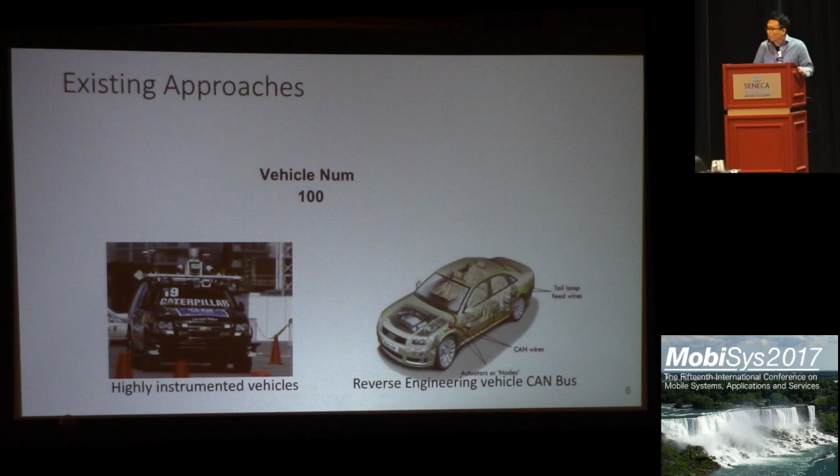Most existing efforts to collect driving data build on small fleets of highly instrumented vehicles or reverse engineer certain vehicle CAN buses. However, limited by the vehicle numbers, even if they're continuously operating on the road with test drivers, it is still challenging to accumulate a sufficiently large data set in a short time period. So to address this issue, we introduced BigRoad, which can scale road data acquisition to a large number of commercial vehicles, so that we can easily achieve the billion miles goal in a short time period.

BigRoad aims to minimize the instrumentation of the vehicle by relying on a smartphone and an inertial sensor that can be affixed to the vehicle. Such a setup can be easily deployed to a large number of vehicles and significantly accelerate the data acquisition speed.

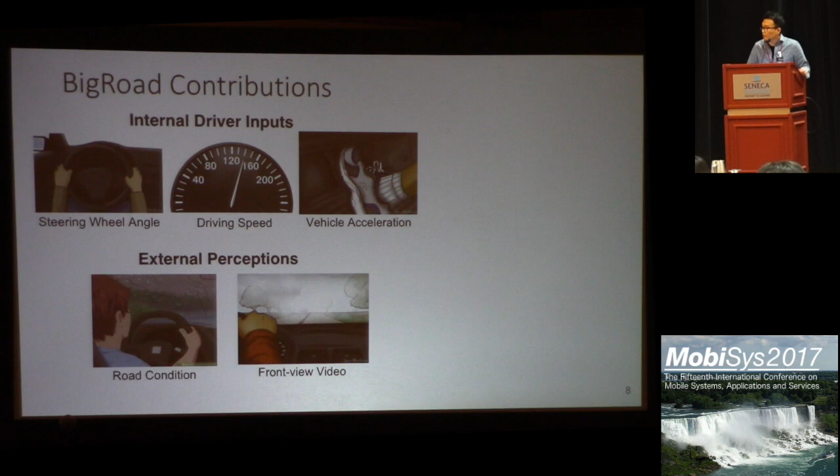Here's the contribution of BigRoad. BigRoad can derive internal driver inputs, such as steering wheel angle, driving speed, vehicle acceleration, and external perceptions of the road environment, such as road condition and front-view video. Most of this data are generated on the same smartphone, so they can share the same timestamp. We believe such synchronized data is extremely useful for training self-driving systems and can be used to detect unusual situations that are useful for self-driving.

Here are two key challenges towards large-scale data acquisition. First, how can we accurately determine proprietary driver inputs, such as the steering wheel operation, with such lightweight instrumentation? The key challenge is that the steering wheel angle is proprietary data that is not available from the commercial OBD device, and the accuracy requirement for self-driving is really high. So it is really hard for us to accurately determine the steering wheel angle with some naive approach, such as using a camera or a smartphone mounted on the dashboard.

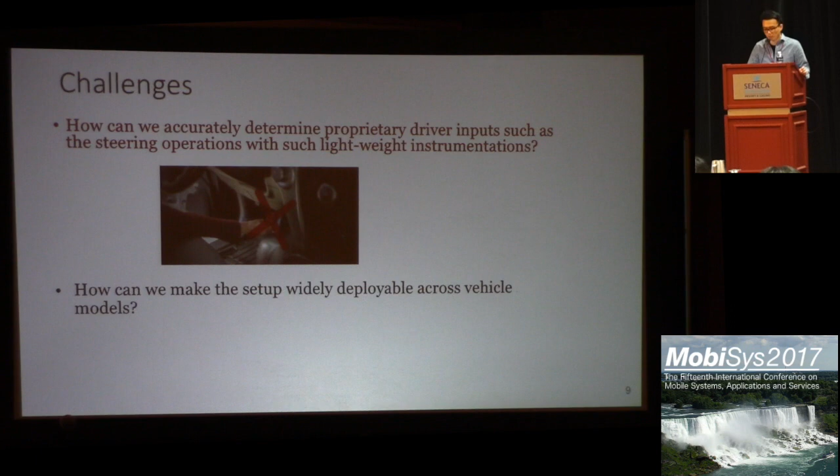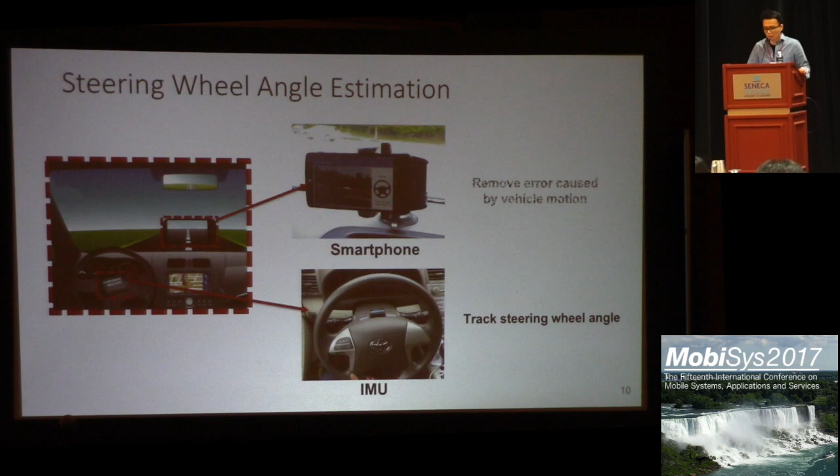So here we introduce a steering wheel angle estimation method based on a smartphone and the inertial sensor, which we'll call IMU in the later part, on the steering wheel. The reason we pick IMU is it can be used to track the steering wheel motion with a really low installation overhead. So the contribution here is we use the IMU to track the steering wheel angle and use the inertial measurement from the smartphone to remove in real time the error caused by the vehicle motion.

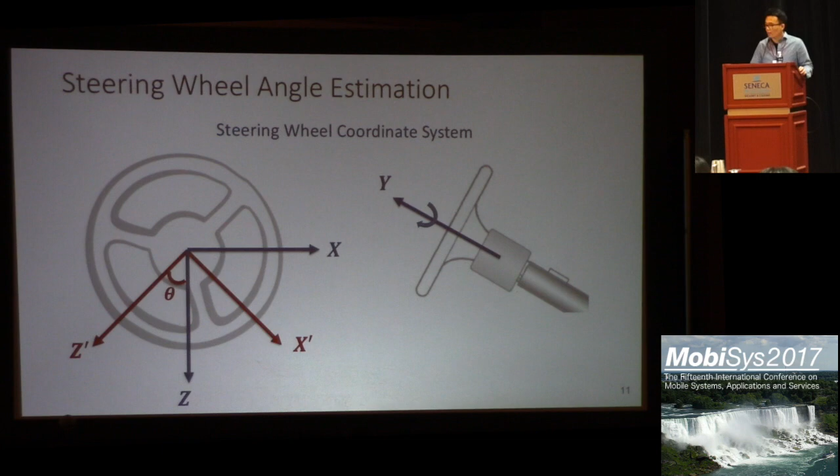So before I go into much detail, I will first introduce the steering wheel coordinate system. As you can see here, in this coordinate system the axes lie on the two-dimensional plane of the steering wheel, and its y-axis, as shown in the right figure, is perpendicular to this two-dimensional plane, pointing out of the steering wheel. So we assume that the IMU's sensor measurement can be read inside this steering wheel coordinate system at this point. When the steering wheel is rotating, it will rotate around its y-axis for a certain degree theta. Typically, there are two approaches to derive this angle change.

First, we can use the gravity projected on the two axes, x and z, to derive this steering wheel angle, which we call the accelerometer-based approach. However, the accelerometer reading from the inertial sensor has large dynamic error, which will cause a large vibration at once.

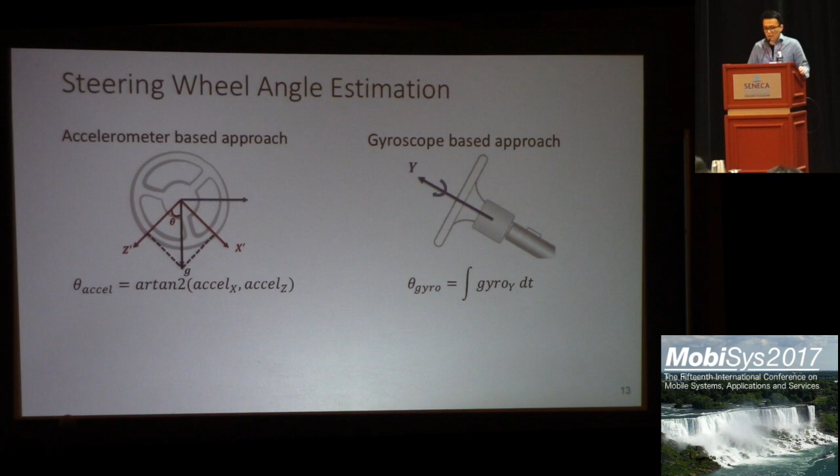The second approach is based on the gyroscope reading. So we can accumulate the angular velocity on the y-axis of the steering wheel to get this steering wheel angle change. However, the integration process suffers from accumulating error, which will result in a large drift over time.

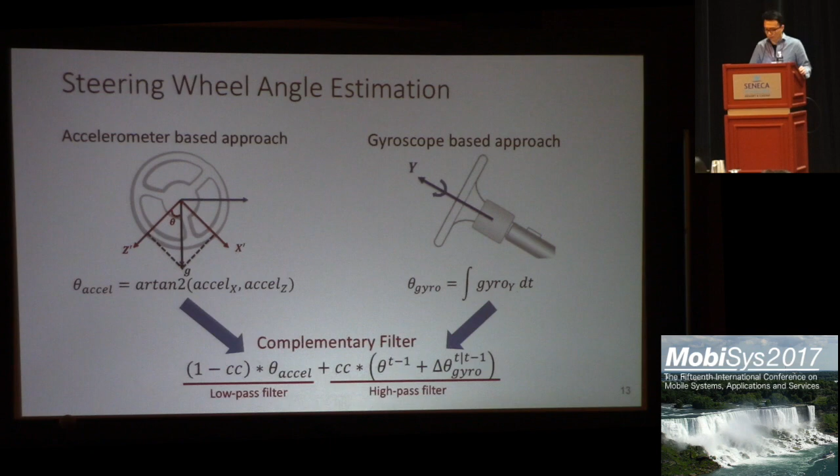To overcome these limitations, we use a complementary filter to fuse the result of the two approaches. We use a high-pass filter to fuse the gyroscope-based approach, and we put the accelerometer-based approach to a low-pass filter to fix this drift problem. And the parameters you see here, we use them to adjust the weight of the two filters.

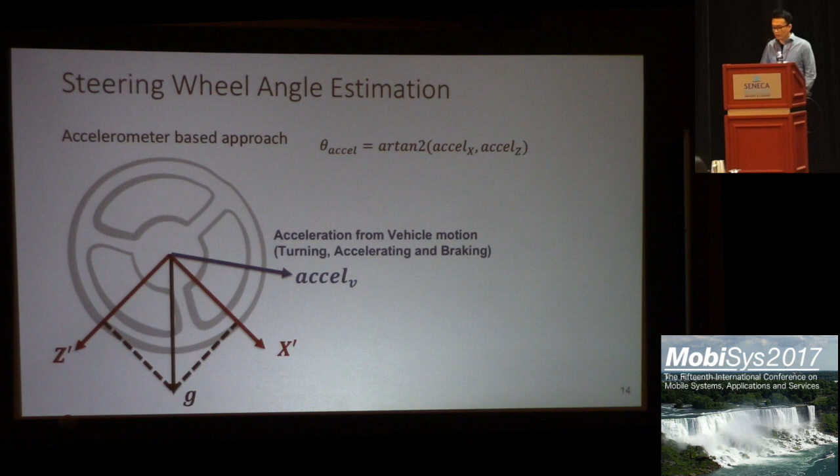However, we find that this accelerometer-based approach may not work very well inside the vehicle system. Because in the vehicle, besides the gravity, the vehicle's acceleration will also apply on this two-dimensional plane of the steering wheel. This acceleration will be caused by vehicle turning, accelerating or braking. We empirically find that this acceleration may cause 10 to even 30-degree error when the vehicle is turning. So a method is needed to remove this error, the error caused by the vehicle motion.

Based on some mathematical derivation that we explain in detail in our paper, we find that this error can be calculated by only using the acceleration in the vehicle's coordinate system. And it is independent of the rotation of the steering wheel. So we use the accelerometer reading from the smartphone to calculate this error and remove this from the accelerometer-based approach result.

Here's the illustration of how this process benefits our system. The green curve is the estimated result before we remove this error, and the blue curve is the result after we remove it. And comparing them with the red curve, which is the ground truth, we show that the result significantly improved after we apply this motion removal algorithm.

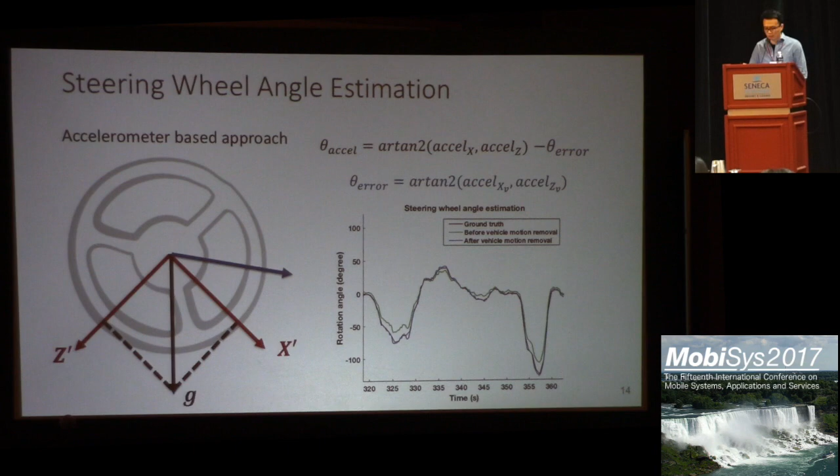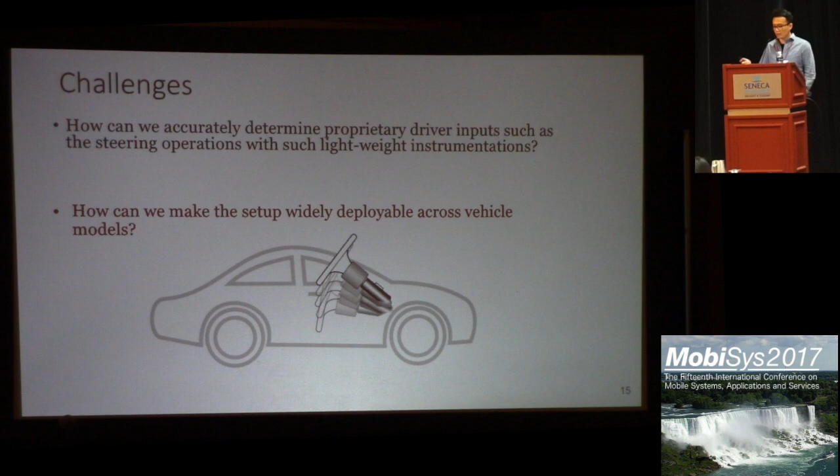Here we come to the second challenge. How can we make the system deployable across different vehicle models? In order to make the system deployable in a large number of different vehicles, we need to make sure that the system can calibrate itself to different steering wheel positions, and also the different sensor placement on the steering wheel. So to solve this problem, we propose a device calibration method.

The challenge here is that most devices have their own coordinate system, and the sensor measurements need to be aligned to a fixed coordinate system before they're useful. So in this process, we first align the coordinate system of the two devices to the vehicle's coordinate system with our coordinate alignment, which we introduced in our previous work. And we also propose a new method to further align the IMU coordinate system to the steering wheel coordinate system we introduced in the previous slide.

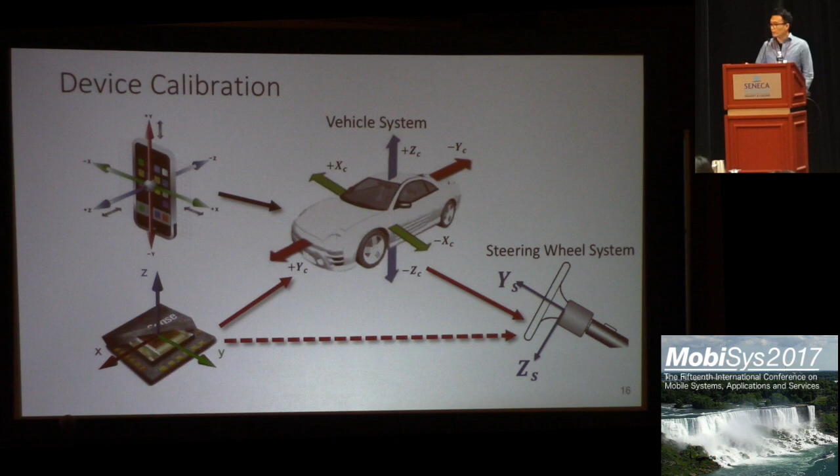So here, given the vehicle's coordinate system and the steering wheel coordinate system inside, when the steering wheel is turning, based on the angular velocity projected on the y and z axis of the vehicle's coordinate system, we can calculate this phi pitch, which is the pitch angle of the steering wheel, and further align the IMU from the vehicle's coordinate system to the steering wheel's coordinate system. Note that with this mechanism, as long as the IMU is mounted on the rotating part of the steering wheel, we can rotate its coordinate system to the steering wheel's coordinate system.

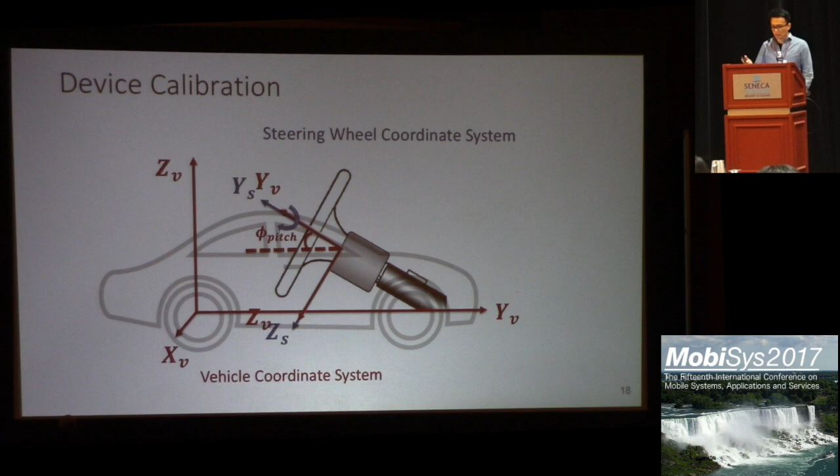And besides, we also propose a road condition estimation method. This method is different from previous approaches that depend on additional setup near the tire or rely on cameras that are affected by the condition.

We put the IMU on the steering wheel and the smartphone on top of the dashboard. The whole experiment contains 6 vehicle models, 7 drivers, 143 daily commute drives in a 3-month period, in various types of road conditions in New Jersey and New York State.

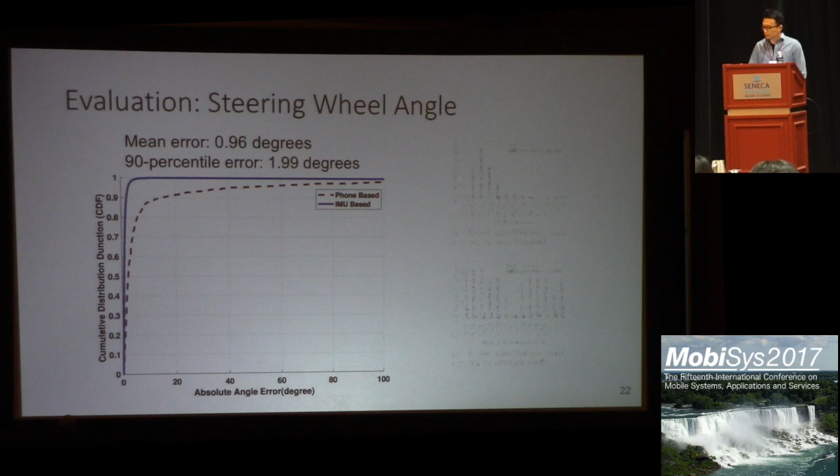By comparing our method with a baseline phone-based approach, we saw that BigRoad can accurately determine the steering wheel angle with a mean error of 0.96 degree and 90th percentile error of 1.99 degree. With this error, it is even better than some commercial steering wheel sensors designed for vehicle uses. More detailed results can be found in our paper.

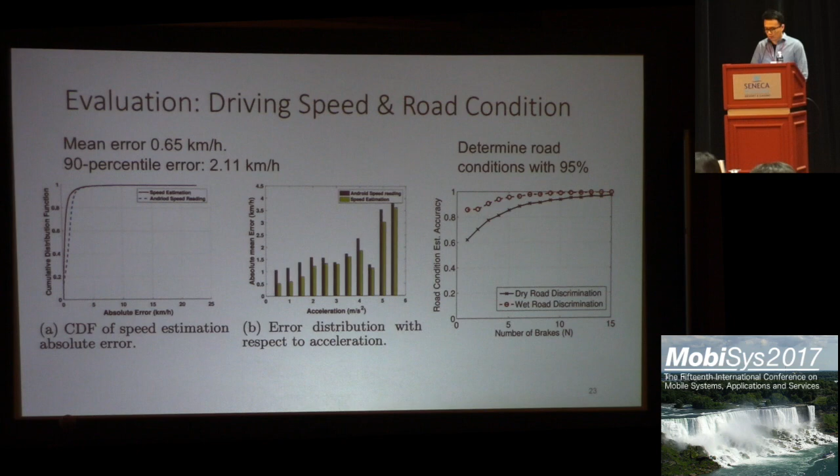Second, we showed that BigRoad's driving speed reading outperformed Android speed reading with a mean error of 0.65 km/h. And for the road condition, we showed that BigRoad can determine whether the road is dry or wet with 95% accuracy using only 5 brakes.

And we further want to know whether the data from BigRoad is useful for self-driving. So here, we push the data we collected into a deep neural network-based self-steering algorithm. This algorithm takes the input of the front video and outputs the steering wheel angle for each frame. This algorithm contains 3 convolutional layers and 2 fully connected layers.

We push the data we collected from the vehicle CAN bus, which you can assume is the ground truth, and the data collected from BigRoad to this algorithm separately and generated 2 models. Here we use the 2 models to predict the steering wheel angle for driving. And we show that the model trained with BigRoad can achieve similar performance compared to the one trained with the vehicle data, with a mean error of only 0.9 degrees.

So here I'm going to conclude my work. In this talk, I present BigRoad that can scale road data acquisition to a large number of vehicles that can be used for self-driving. And we show that the driving and road data can be estimated accurately using very few off-the-shelf sensing devices like the smartphone and the inertial sensor. We also show that BigRoad can calibrate itself to different vehicle models, steering wheel positions and sensor placement.

In the future, we plan to build an easy-to-install and sustainable setup for BigRoad so that we can really deploy it to a large number of vehicles without much human operation and with a sufficiently long lifetime. Second, we will design an interesting and unusual event detection method on the smartphone so that we can provide the data we collected another layer of information. And the final goal is to deploy the BigRoad system to a large number of vehicles and generate a useful data set for the self-driving community.